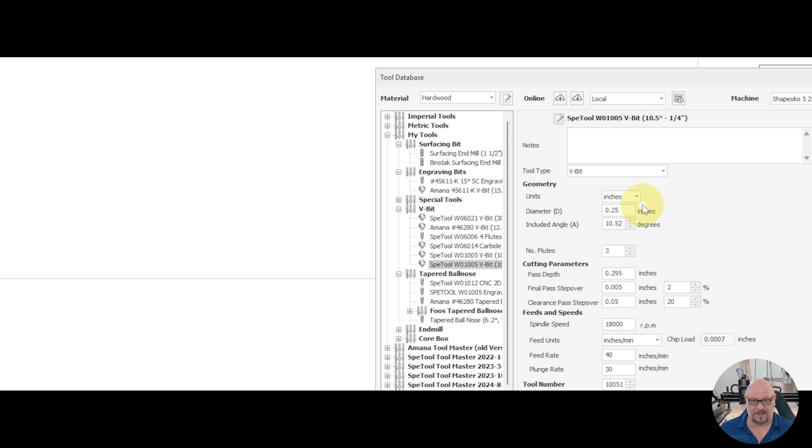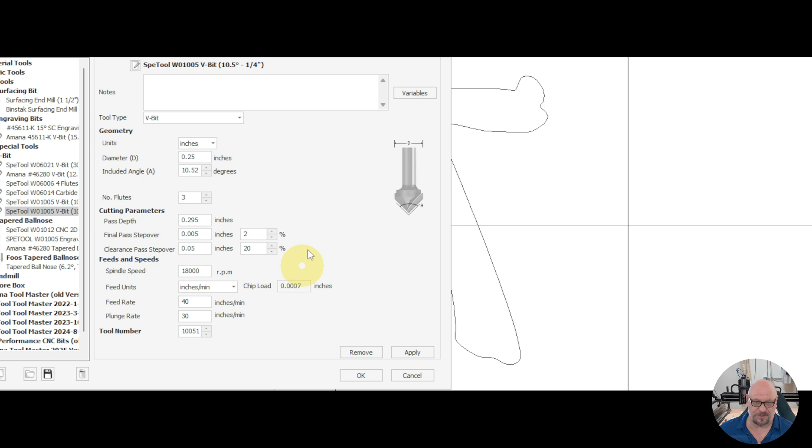For a toolpath, I want to show you that I've created a tool that is in Imperial units. This is a copy of the SpeTool W01005, but I've configured this in inches. We are going to allow for a max pass depth of 0.295 inches, which is beyond 1/4 of an inch, and our feed rate will be 40 and plunge rate 30, and that can of course be adjusted based on your particular machine setup.

So now we'll switch over to our Toolpaths tab, and we'll start with a Vcarve inlay, but we're going to first highlight our first vector. And then we can do a Vcarve engraving toolpath. Start depth is 0. This is the pocket side. Flat depth will be 0.236 inches, which is the equivalent of my normal measurements using the metric measurements.

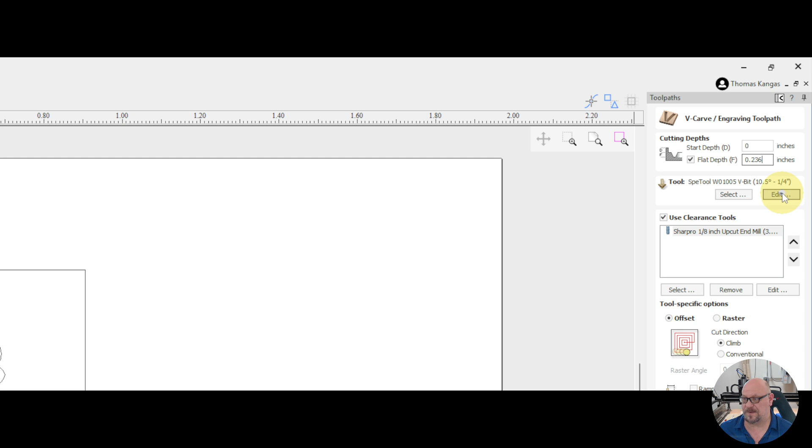For our tool, we'll make sure we select that SpeTool W01005 bit, which is configured as an Imperial unit bit. And we will go full depth on that. And we'll use a clearance tool of the Sharpro 1/8 inch tool bit, or 1/8 inch upcut end mill. That will not show up when we do the pocket side, but it will show up whenever we do our plug side.

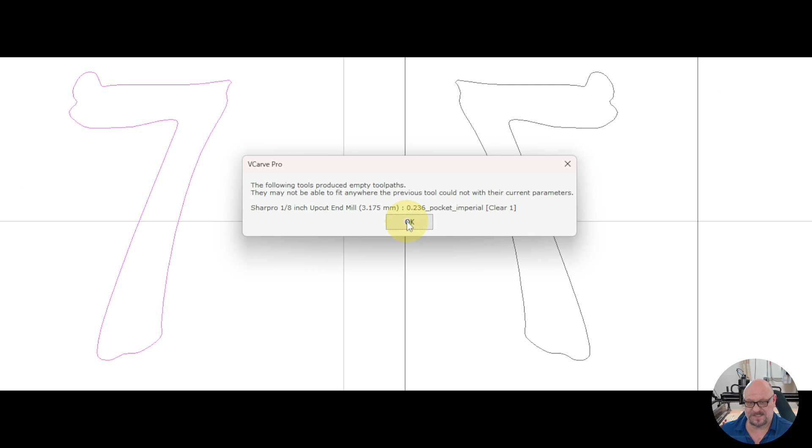We'll give this a name of 0.236_pocket_Imperial, or Freedom units for those of you that are inclined to refer to them as such. We'll go ahead and calculate those out. And as we see, we get our error telling us that we won't be using the 1/8 inch end mill, which is fine. We can click on OK. Generates our toolpath.

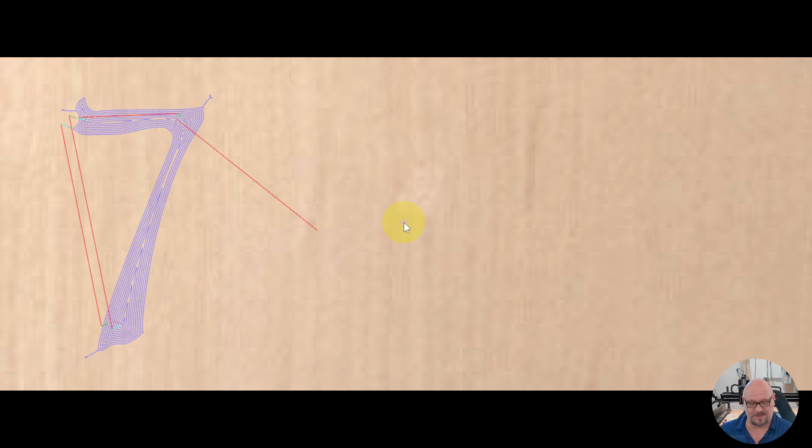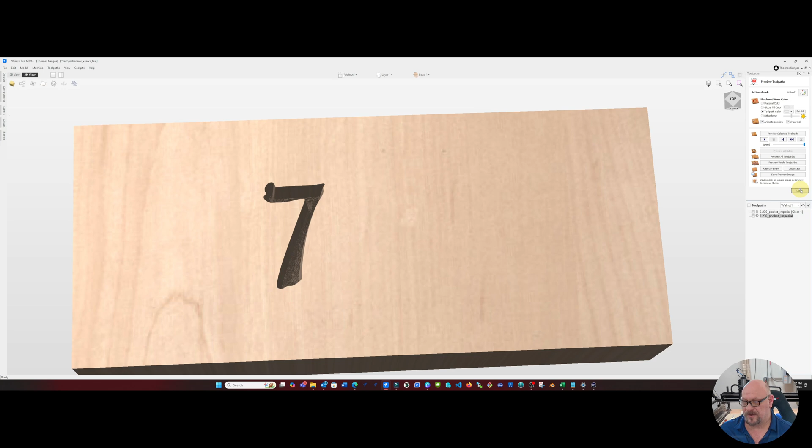And we can zoom out on that and run the toolpath. And we'll see we have our 0.236 inch deep pocket. Go ahead and close that out. And now we can generate another toolpath.

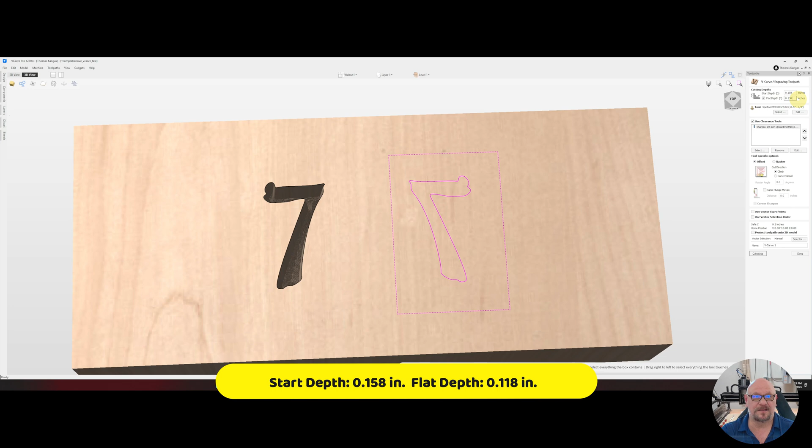And this time we're going to highlight our mirrored number 7 and its border. Going to use the same SpeTool W01005 V-bit at 1/4 inch. But this time we're going to set our start depth at 0.158 inches and a flat depth of 0.118 inches. And we're going to use the Sharpro 1/8 inch upcut end mill, or any 1/8 inch end mill that you have.

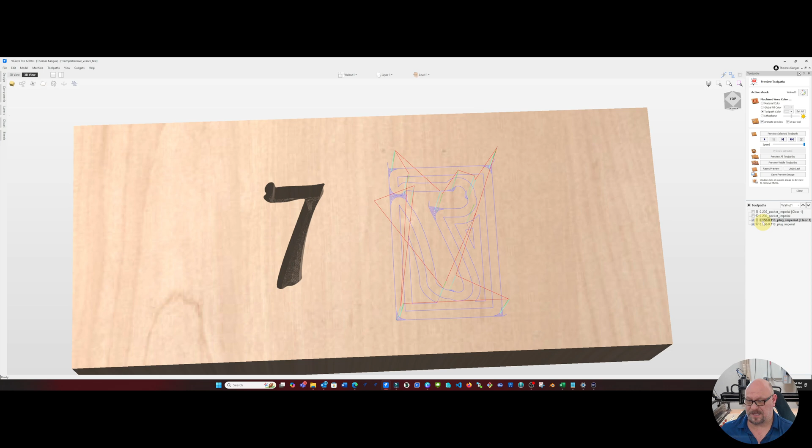We will call this our 0.158-0.118_plug_Imperial and calculate that out. And now we can run our clearance toolpath. You'll see that it uses the 1/8 inch end mill, and follow that up with our V-bit.

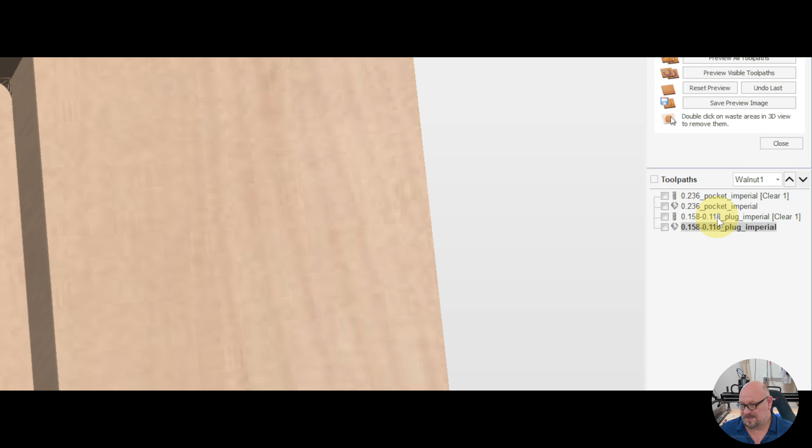Now once those are completed, what we want to do is take these three toolpaths and arrange them in a way that we can run them together, since this is a test. So we're going to move the pocket to the very bottom, and then we're going to make sure that the V-bit for the plug is one above that, and the 1/8 inch for the plug is above that.

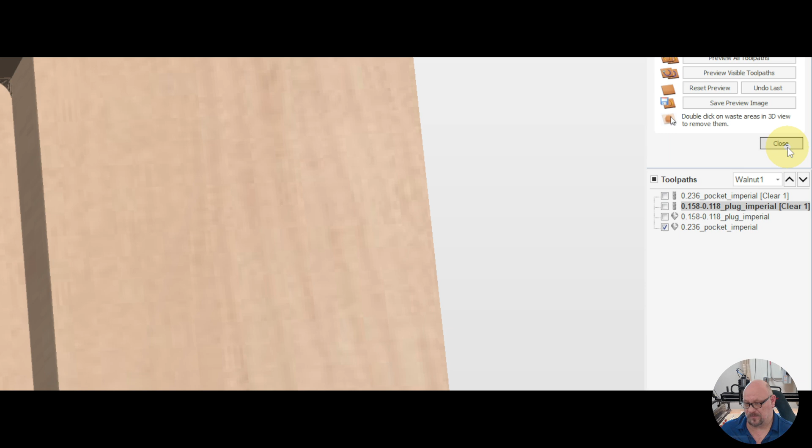That way, when we run those three toolpaths as a single file, it will run them in the order of 1/8 inch end mill and then the V-bit. So now we can go ahead and export that out to the CNC and get it run, and we'll see what we've got.

Okay, so here we're going to try to get a fit for our 0.158 inch plug into our pocket. As we see, we got a little bit of looseness there, so we're going to have to tighten that up just a little bit, as it comes in and out a little too easy.

Okay, so we saw that our plug was a little bit too loose, so there's some adjustments we can make to improve the fit of the plug into the pocket. I'm going to give you two formulas here, one for if you're too loose and one for if you're too tight on your plug. If you're too loose, reduce the start depth and increase your flat depth. In both cases, your plug start depth plus your plug flat depth should equal your pocket depth plus

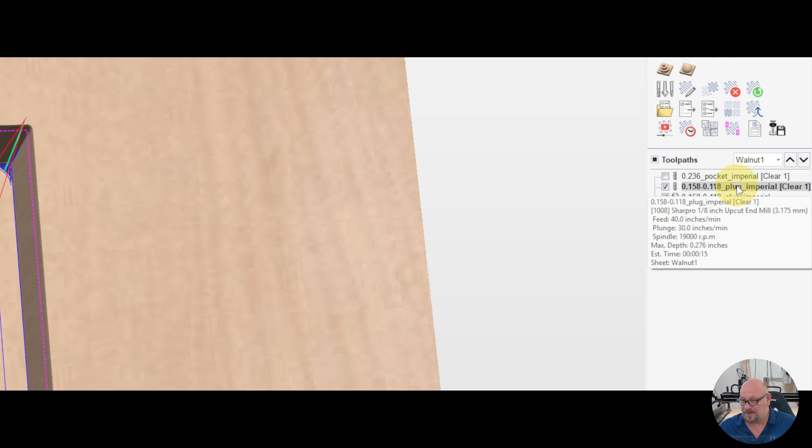0.040 inches. So in our case, we will reduce our start depth, increase our flat depth. We'll go and even them out at 0.138 and 0.138 inches and see what we get. So to do that, we're going to go ahead and take our 0.158 and 118. We're going to duplicate that. And once we've duplicated it, you'll see that we have a 158 with a clear 1 and then a 1 in brackets. So that's the toolpath we're actually going to edit.

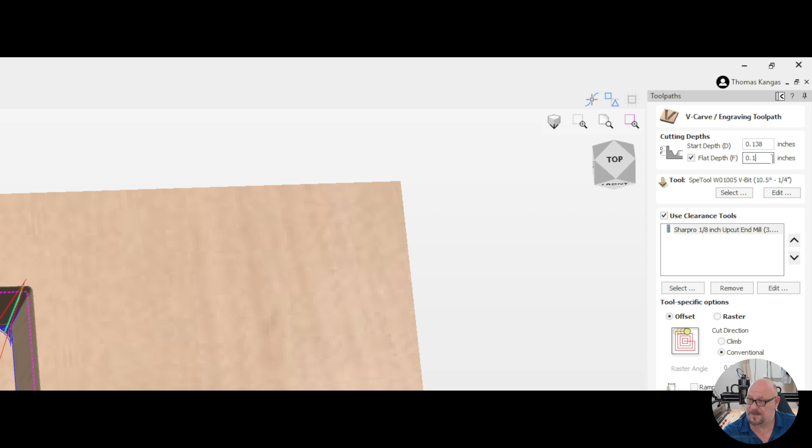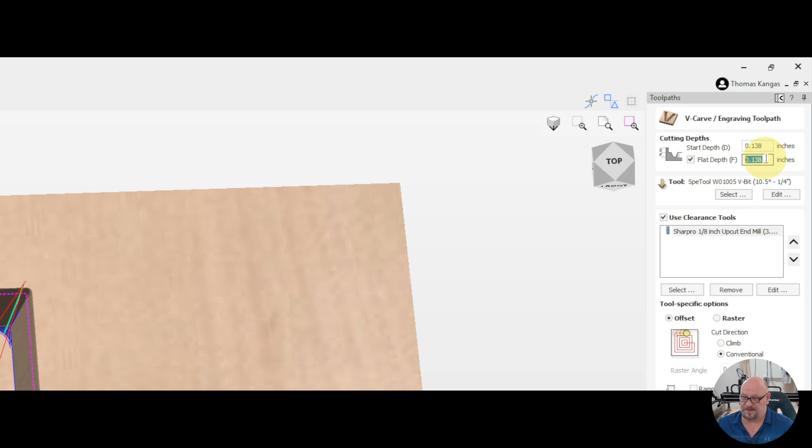And we're going to change that to a start depth of 0.138 inches. So we're decreasing our start depth. And we're going to change the flat depth to 0.138 inches. Oop. Get zoomed in there again so everyone can see that. That's again a start depth of 138 and a flat depth of 138. And we will rename the toolpath to 138 and 138. We'll get rid of that clear off of there.

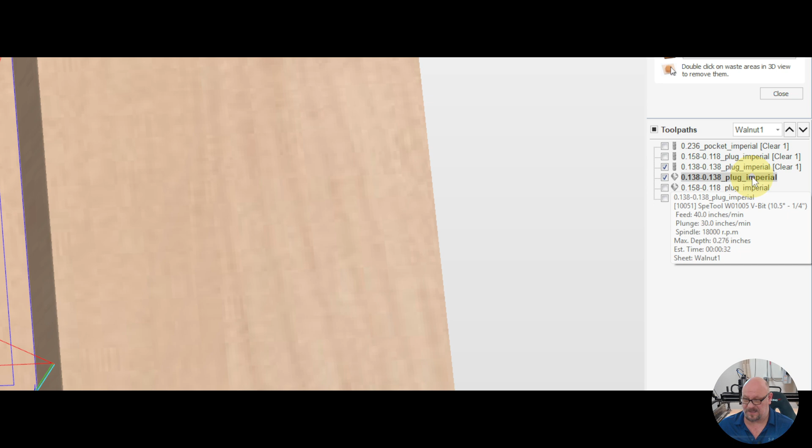We'll calculate it out. And now we see we've got a 138 for the clearance and a 138 for the plug. What we will do there is arrange those again so that they are going to be run first with the 1/8 inch and then the V-bit. We don't need to do the pocket again since we have a pocket from our previous cut. We'll go ahead and export those out to the CNC and get them run.

So as we see on the cut, we will have a clean inlay with no gaps around the pocket when it comes into focus there. A little bit fuzzy, but we'll clean that up.

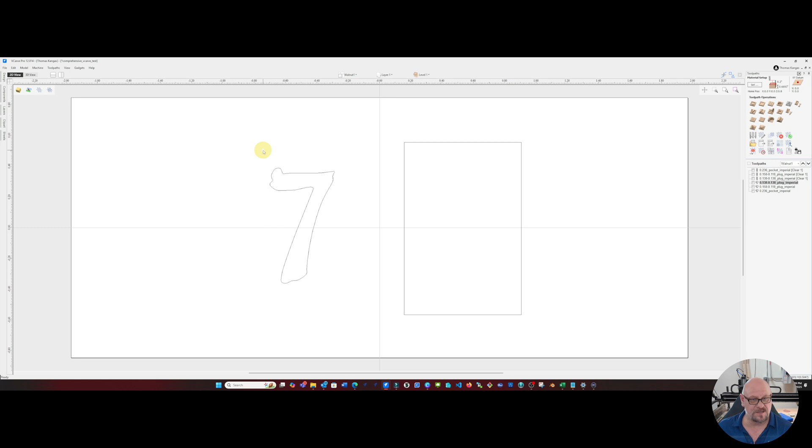Okay, so now let's move on to our Vcarve Inlay Toolpath. And the very first thing that I want to do is I want to delete that inverted or that mirrored 7, because when we create our toolpath, it's going to create that automatically for us. So we'll start by highlighting our vector that we're going to use for our pocket. And then we are going to go to our Vcarve Inlay Toolpath.

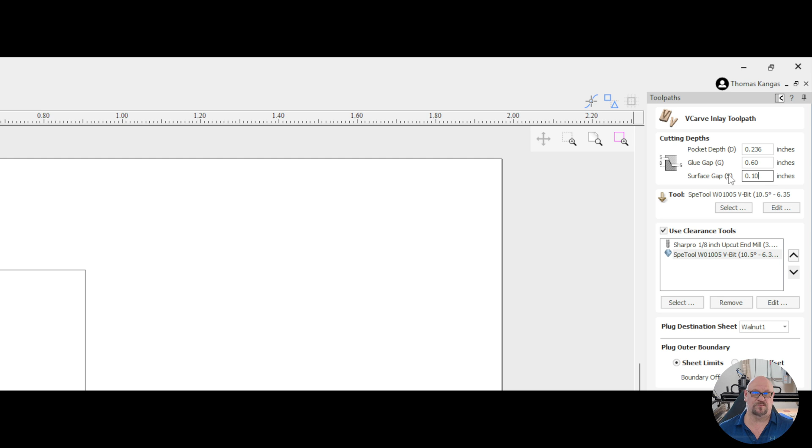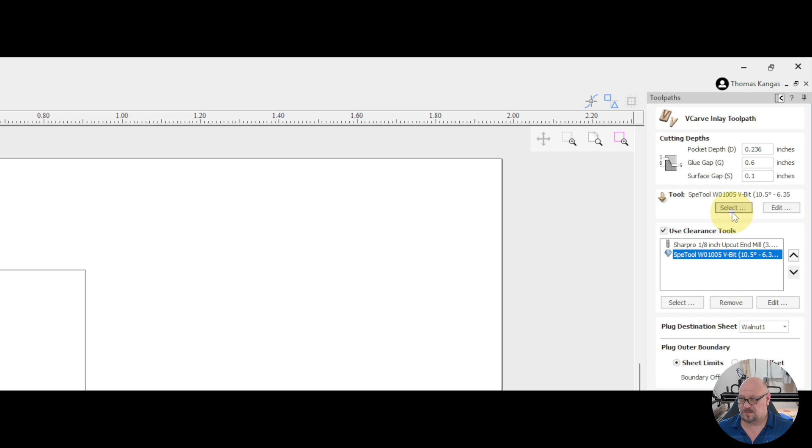And here we're going to set a start depth again, or a pocket depth of 0.236. And we will start off with a glue gap of 0.06 and a surface gap of 0.10. So the idea behind this is that we're going to use the formula pocket depth minus glue gap plus surface gap equals pocket depth plus 0.04 inches. And this should give us a good toolpath to work with. So we will go ahead, we're going to select our 1/4 inch SpeTool. We'll go ahead and select that, go full depth.

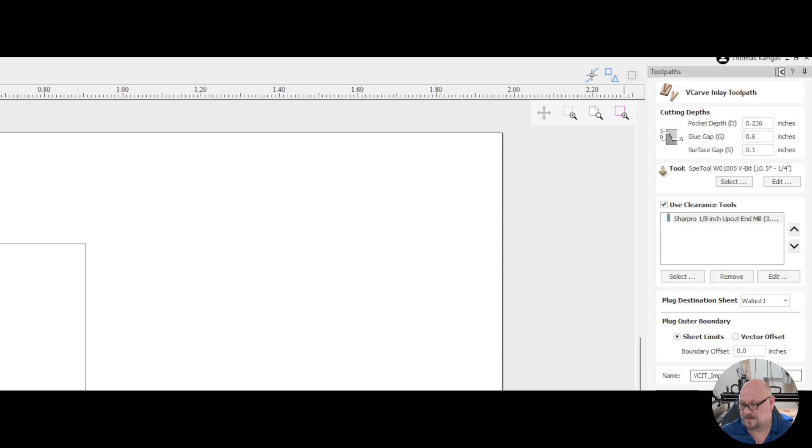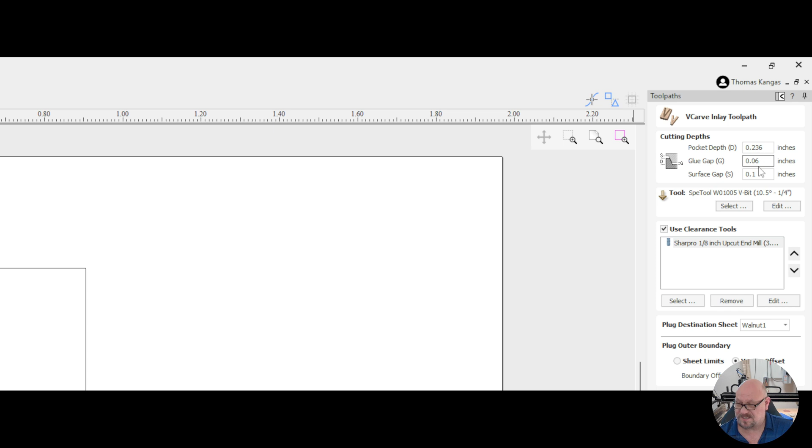We can remove that extra gap there. And we will call this VCIT for Vcarve Inlay Toolpath _ Imperial. And what we're going to do, we're going to do a vector offset of 0.25 inches, and that will create a boundary around our mirrored vector. So we'll go ahead and calculate that. Oh, looks like I typed that incorrectly. It should be 0.06. So let's try to calculate that again.

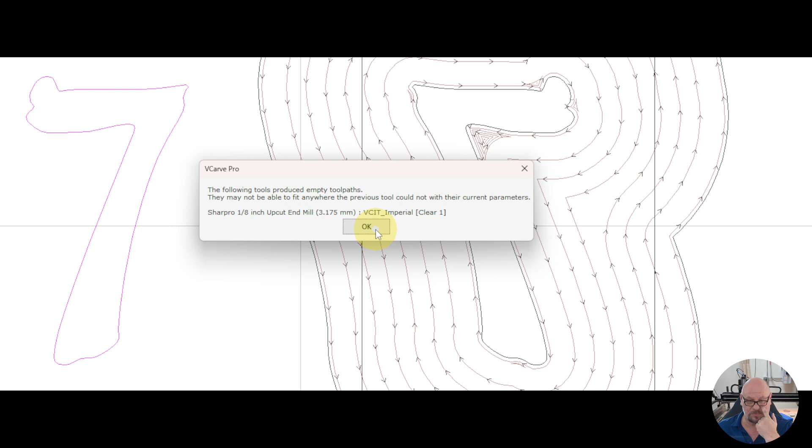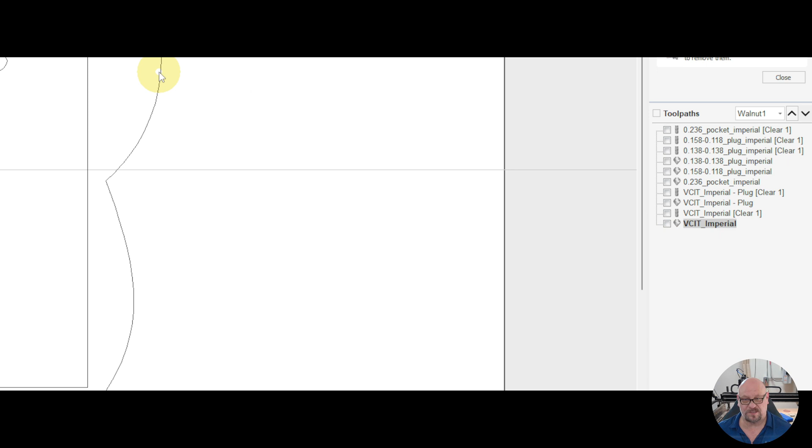And of course it says we may not be able to use the 1/8 inch on the upcut, and we're fine with that. So now we've got our toolpaths, and you see it made this offset vector. We're actually going to go back into our 2D toolpath. And what we will do is we will delete that vector, and we will do our plug, highlight both vectors, and calculate that again. And now we have our square vector offset.

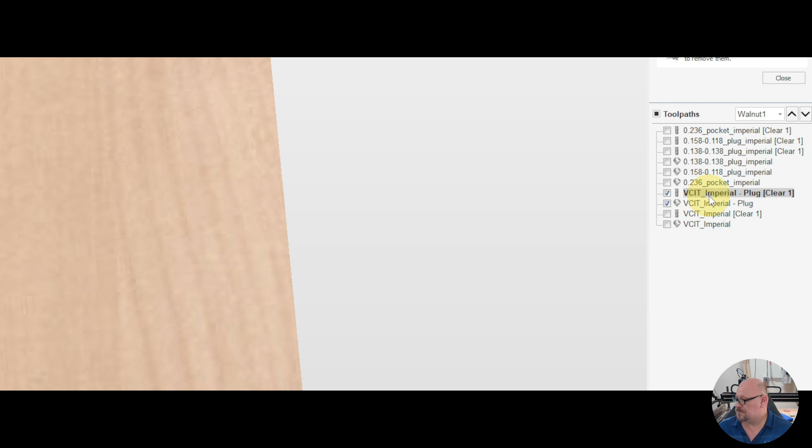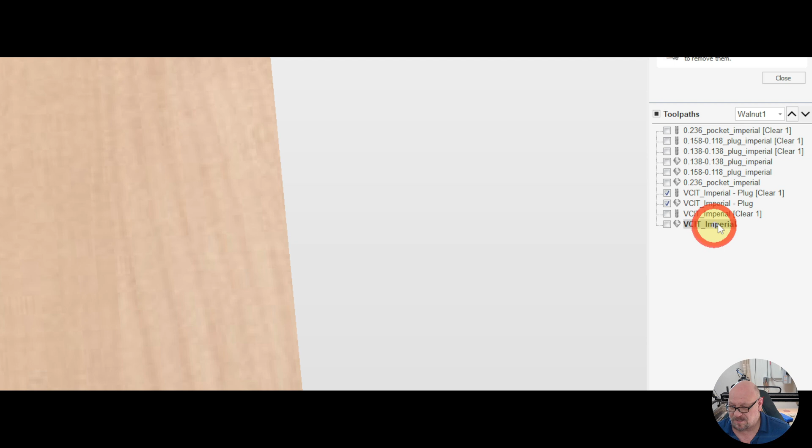Now what we should be able to do is go ahead and arrange these. Arrange them in order to where we are first using the clearance. So we need the plug first with a 1/8 inch end mill. And then we will go with the plug V-bit and the plug, or the pocket V-bit. We can delete this toolpath because it's not going to be needed.

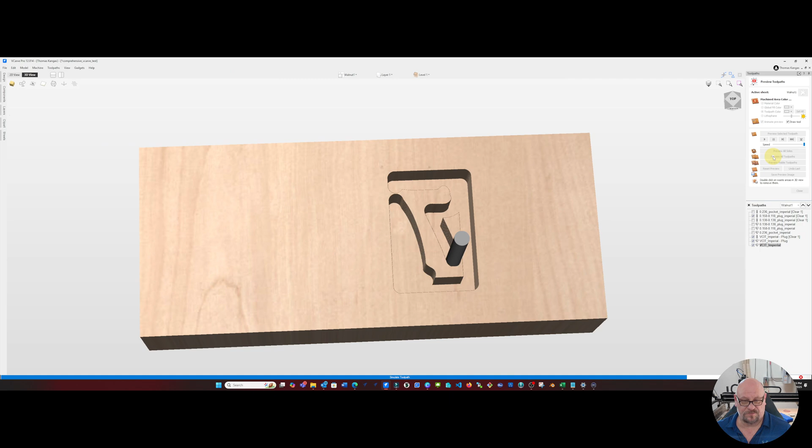Let's go ahead and preview our toolpaths. And it goes with the pocket and then the V-bit, and there's our cut. We can go ahead and export these now and cut them out on the CNC.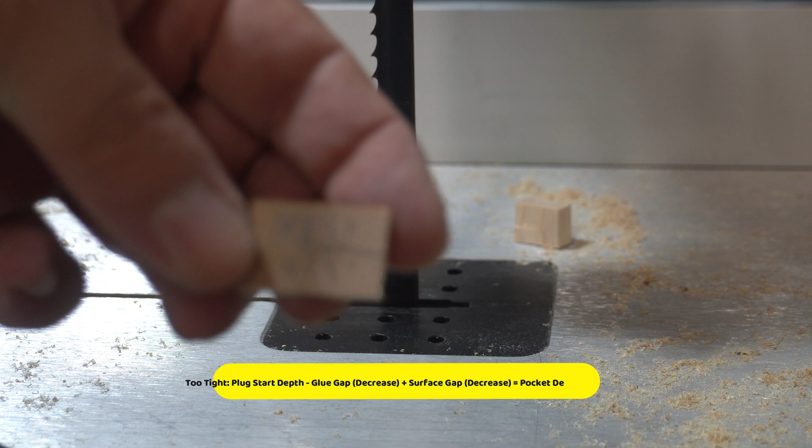So as we'll see here in the clip, our plug is too loose at 0.060 glue gap and 0.1 surface gap. So we're going to have to use a formula to fix that. That formula is plug depth minus glue gap plus surface gap will equal the pocket depth plus 0.040 inches. If our plug was too tight, we would have our plug depth or our glue gap and surface gap decreased, and otherwise the formula is the same.

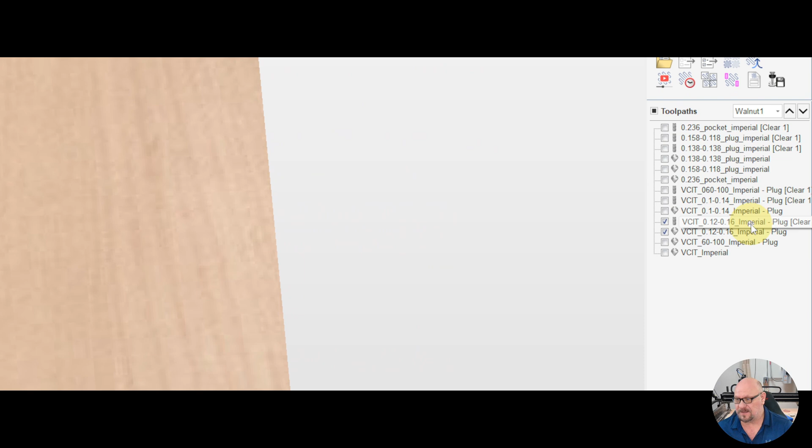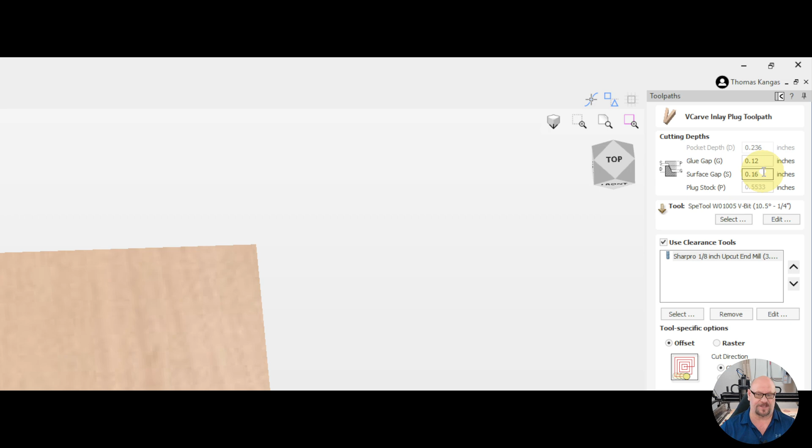So after working the parameters, I finally came to a good set of parameters where our glue gap is 0.12 inches and our surface gap is 0.16 inches. And this is again using the formula of plug depth minus glue gap plus surface gap equals pocket depth plus 0.040 inches. So with that formula, we finally got a good number.

So now that I've shown you how to determine good parameters for end grain inlays using the Zank method and the Vcarve Inlay Toolpath, let's take a look at the special considerations for Facegrain inlays, which are less common but can still be tricky to get right. Let's take a look. Okay, so for our Facegrain, let's go ahead and start with getting our Zank method toolpaths.

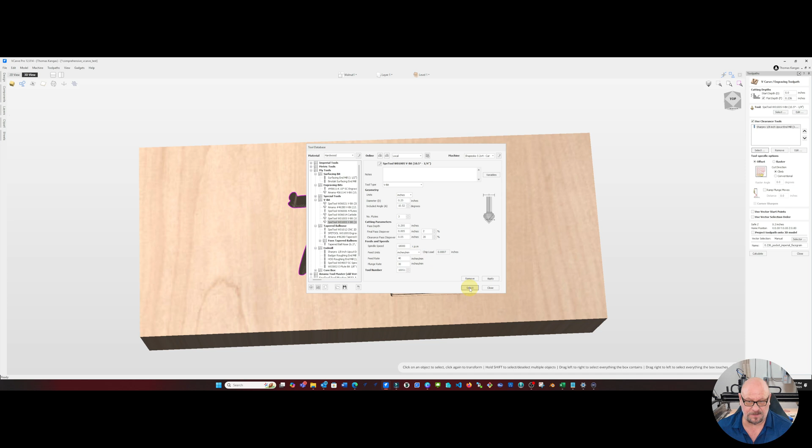We'll start with the Imperial. We're going to duplicate that, and we are going to name that Imperial underscore Facegrain. And what we're going to do is we're going to add a tool to this. We're going to take and add our SpeTool W01005 tool bit again. Go ahead and select that, leave it at its proper depth.

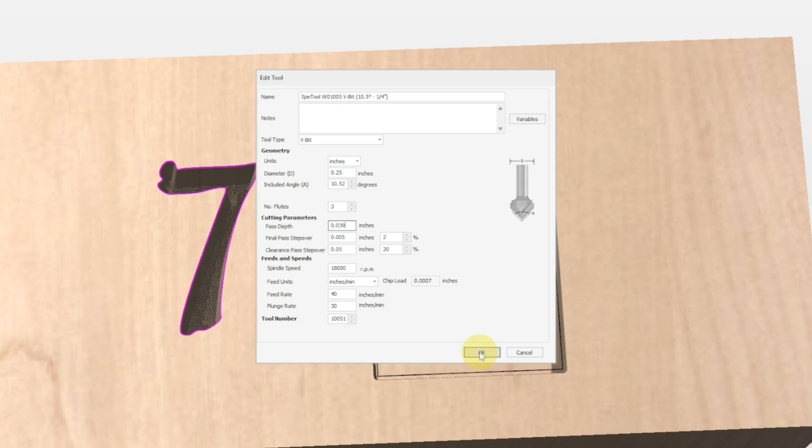And what we will do now is we will edit the W01005 V-bit as our primary tool. What we're going to do for this tool path is make sure that we change our pass depth to 0.039. So this will make just a slight cut, and we'll go down every layer, but it'll only make a slight cut around the contour of the plug or of the pocket. So we can go ahead and calculate that out. And of course, it says we can't use the 1/8 inch end mill, which is fine.

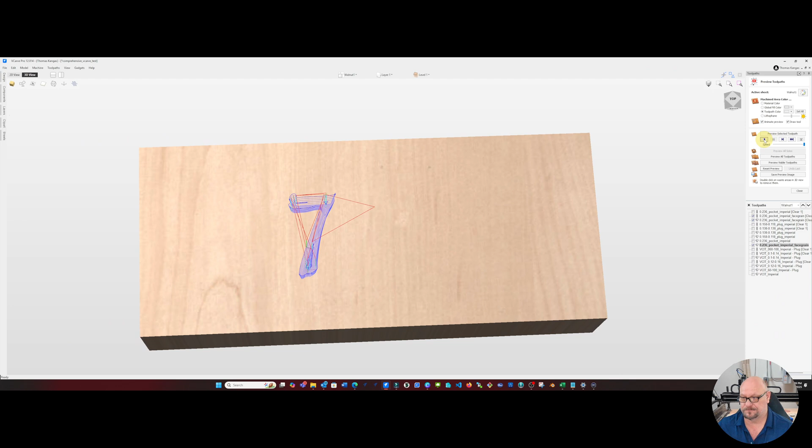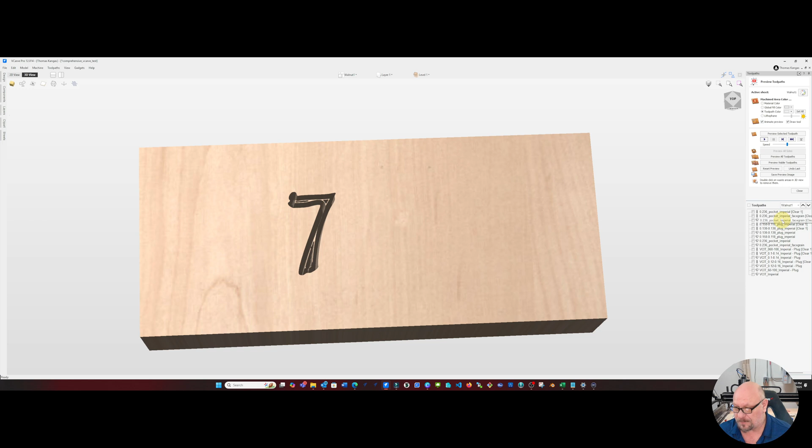Now that we've changed that, let's reset our preview and let's run the pocket tool path. We'll run this about half speed, and you'll see it makes a run around the inside contour of the pocket. And now if we run our clearance tool path, we will do our V-bit clearance tool first for our pocket. And you'll see that it will clear out the rest of that tool path, leaving us with our 0.236 inch deep pocket.

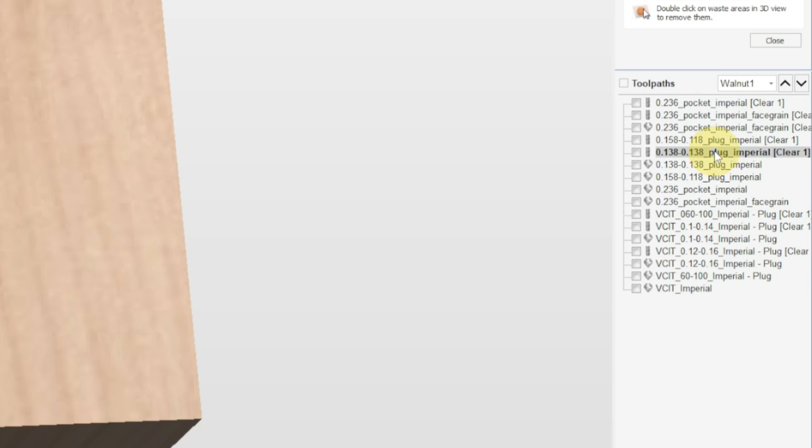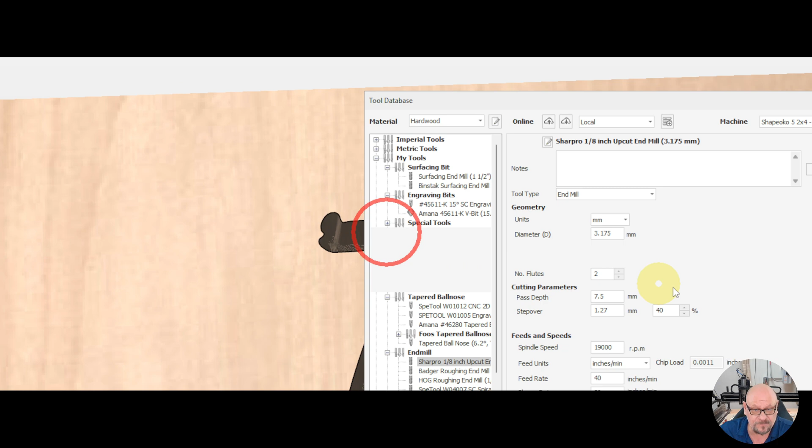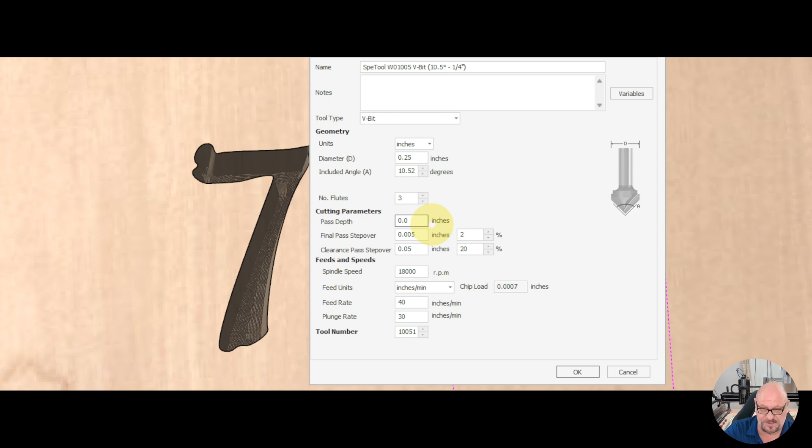Next, we need to duplicate our 0.138 plug. So we will duplicate that. And we will, again, add our V-bit in as a secondary clearance tool and select it. And we will edit our primary tool to only be 0.039 inches. Then what this will do will allow us to do that small cut all the way down.

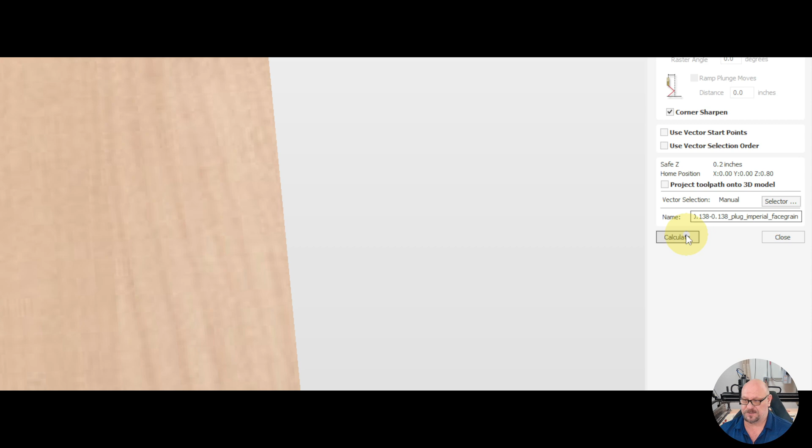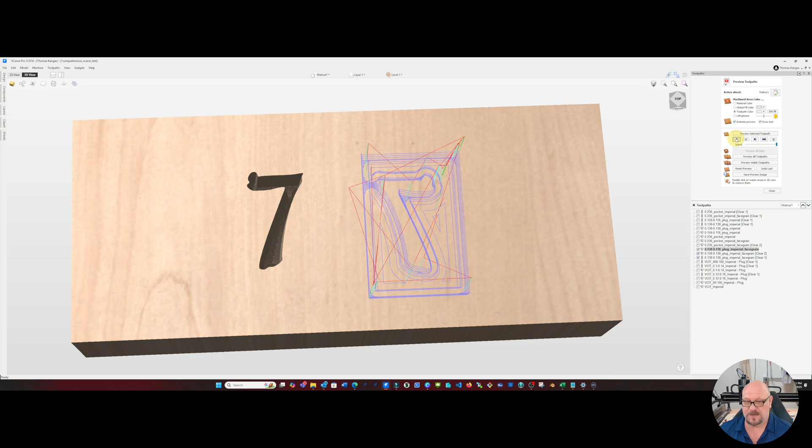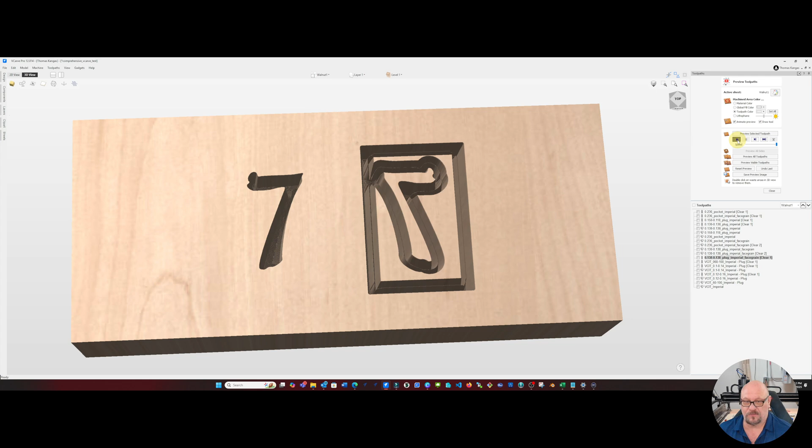We'll rename this to Imperial_Facegrain and calculate that out. Actually, we're missing a, there we go. Got the 7 highlighted. We'll calculate that out. Okay, and now that we calculated out the toolpath, we can go ahead and run the V-bit Facegrain path first. And as you see, we get the contours. Next, we'll run the V-bit again to clear out the surrounding areas around the plug. And then finally, we will run the 1/8 inch toolpath, and it will clean everything up nice for us.

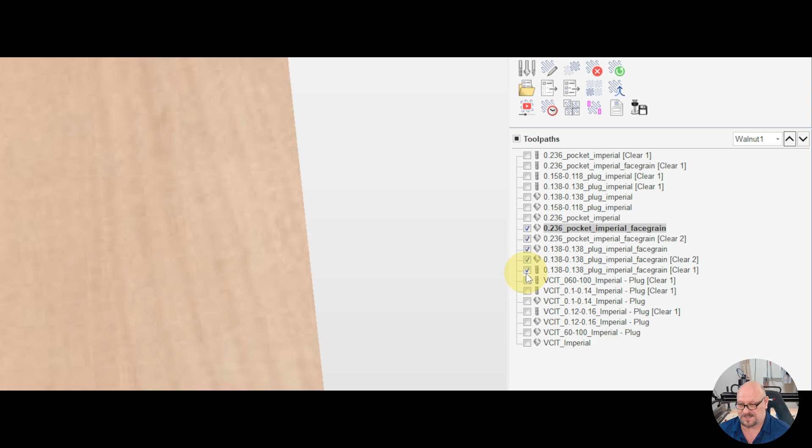Now, the order that we need to have these in is to have the Facegrain toolpath first, followed by clearance 2. And there is no clearance 1 because it won't fit in the pocket. Then we will do our V-bit for our plug, followed by clearance toolpath number 2, which is also the V-bit, and finalize it with the 1/8 inch end mill. And we export all of those paths out to the CNC, and we can go get them cut.

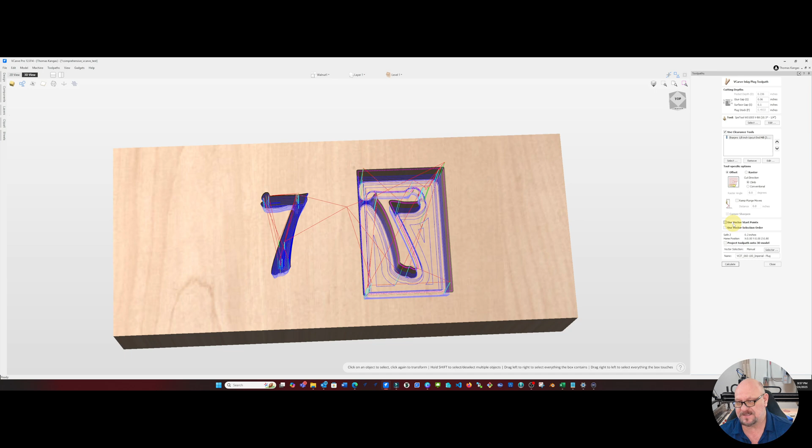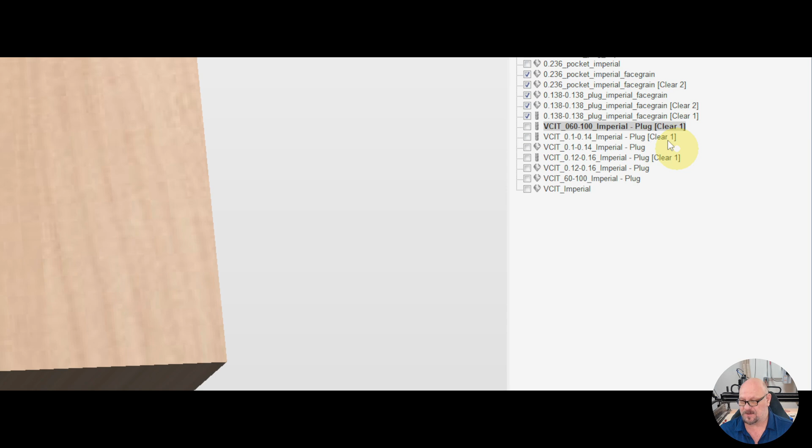Now, as we can see, we've got a pretty clean cut for the Facegrain there. When that's filled with glue, it'll look great. Okay, and the last toolpath we will do is the Vcarve Inlay Toolpath for Facegrain. And what we'll find here is that we do it exactly the same as we do with our Zank Inlay method. We're going to keep our settings. Actually, let me close that one and get our good settings.

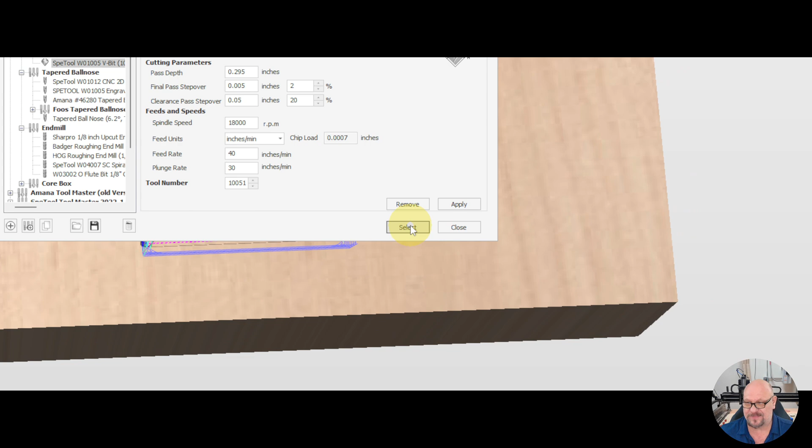And what we will do is we will edit our SpeTool, and we will set our pass depth to 0.039 inches and select OK. And then we will add our V-bit again, and this time we'll keep our original parameter there. So we'll go ahead and add that in. And we will call that Imperial Facegrain. And we'll go ahead and calculate that out.

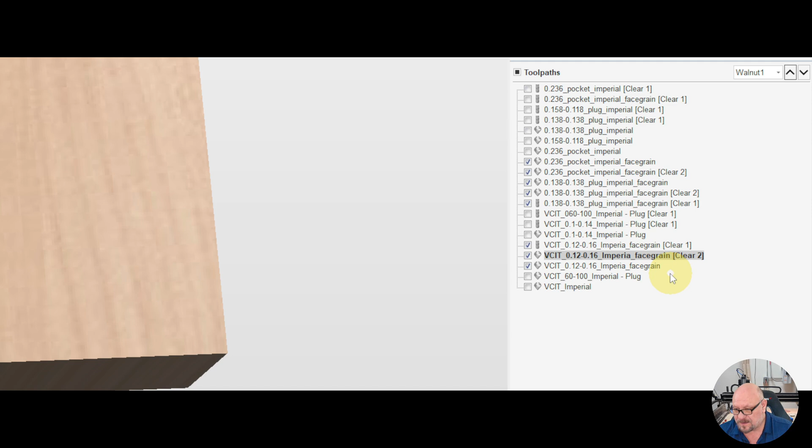And when we run that on the CNC, you'll see the same results as you saw with the Zank Inlay method. In this video, I've shown you the methodology I use for determining Vcarve inlay parameters for both end grain and face grain inlays using Vectric Vcarve Desktop, Pro, and Aspire.